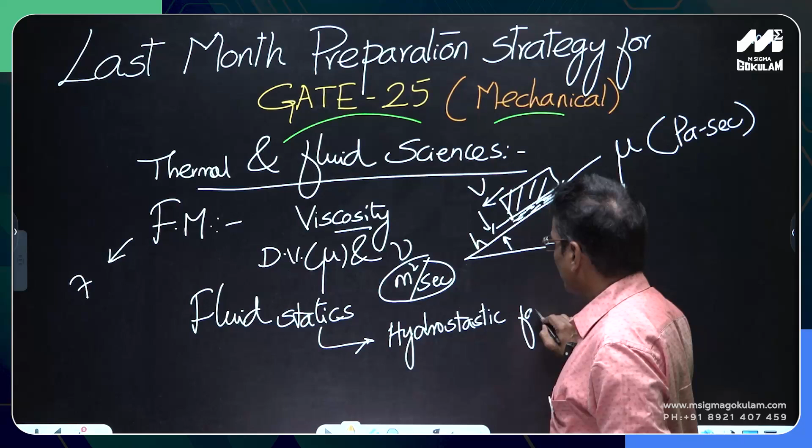Another important chapter where you have to give focus is fluid statics. In fluid statics, the main thing they will ask will be the hydrostatic force. Not many cases are there, just the vertical lamina, horizontal lamina, inclined lamina, and hydrostatic forces on immersed surfaces. Generally certain complicated geometries will be there. For example, there is one cylindrical log, and on one side of the log there is water.

What will be the hydrostatic thrust on that log? Maybe a horizontal thrust, or you may be asked to calculate what is the horizontal thrust and what will be the vertical force. So questions may be asked on hydrostatic forces on curved surfaces. In fact, it was asked in GATE 2004 and in GATE 2013.

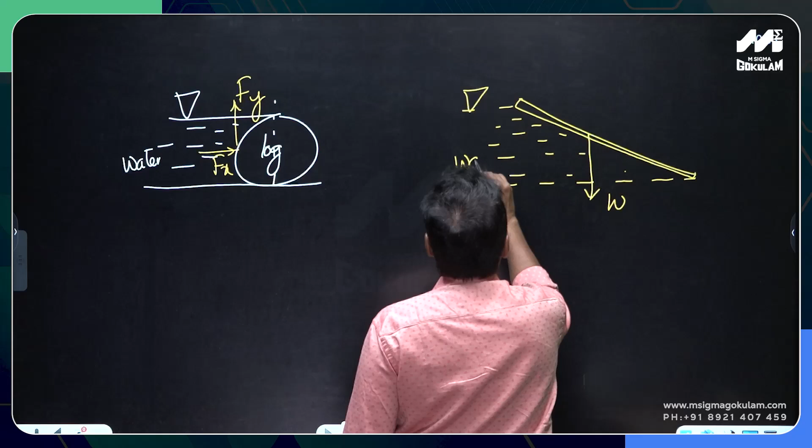In GATE 2013, they asked about one inclined plane carrying water on one side. What should be the minimum weight of the block so that it will not get lifted up by the water force acting on it from the left side? This is all water. So this is a case of the force on an inclined flat plane.

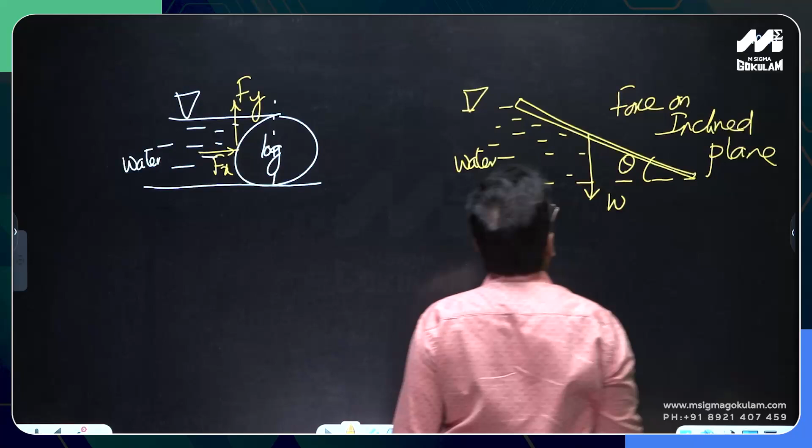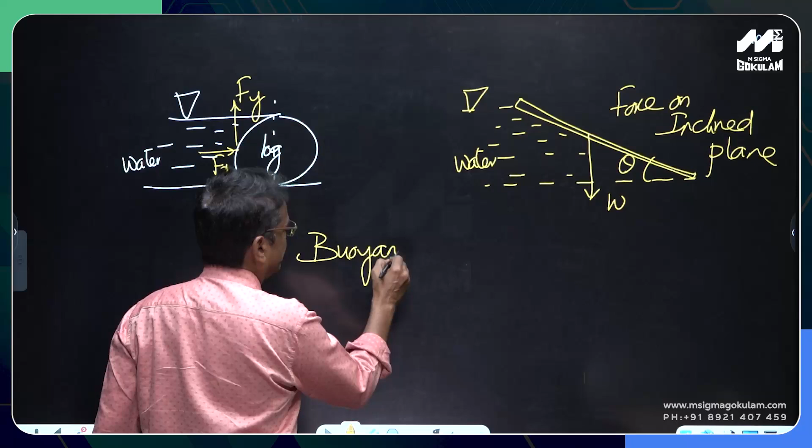You will be given the angle theta there. What will be the minimum weight of that inclined plane body, one side of which is exposed to the water? So questions may be asked in the second chapter on hydrostatic forces. And in that chapter there is another important topic, called buoyancy. Apart from the hydrostatic force, there is buoyancy and flotation, the conditions of static equilibrium in a completely immersed body and a floating body.

As far as buoyancy is concerned, the main important principle we have to remember is the Archimedes principle. Whenever a body is floating over a liquid or submerged inside a fluid, there will be an upthrust acting on the body which is equal to the weight of the liquid displaced by the body. As long as you are quite aware of that principle, you can solve any question given in buoyancy.

A floating body means a ship. A completely submerged body means a submarine or a balloon floating in air. So for a floating body and for a completely submerged body, what are the conditions of equilibrium? There will be stable, unstable and neutral equilibrium. For a completely submerged body, the relative positions of the center of buoyancy and the center of gravity will decide the condition of equilibrium.

Whereas for a floating body like a ship or a boat, the relative positions of the meta-center and the center of gravity will decide the condition of equilibrium. For a completely submerged body like a submarine or a balloon, the relative positions of B and G, the center of buoyancy and the center of gravity, will decide whether it is a stable, unstable or neutral equilibrium. So you have to remember that.

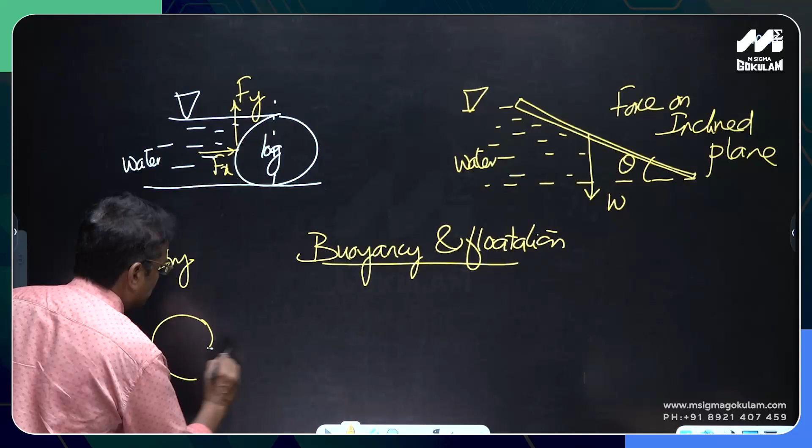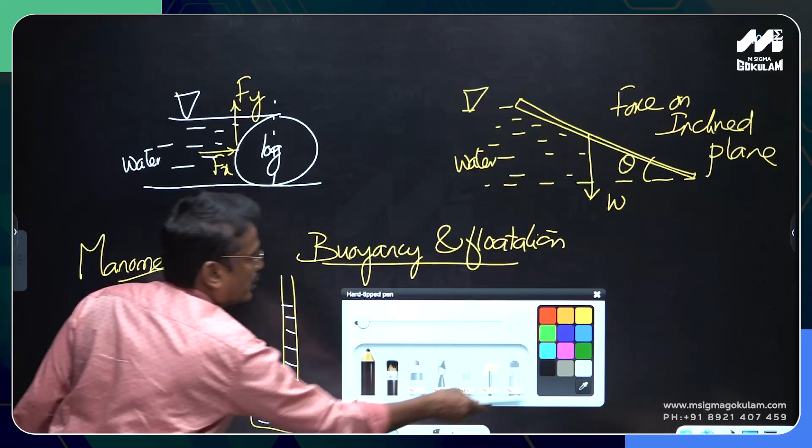In hydrostatics, three important topics are there: manometry, hydrostatic forces on immersed surfaces, and buoyancy and flotation. In buoyancy and flotation, we should know what the meta-center is, and how the relative positions of the meta-center and the center of gravity decide the condition of equilibrium. That is all about fluid statics.

So coming to the single most important chapter in fluid mechanics: fluid kinematics. This is very important, because in fluid kinematics questions will very often be asked. Why? Because it is connected with the mathematical expression of the fluid flow. First of all, we have to decide what is the meaning of the streamline, path line, streak line.

Okay, that is number one. And velocity potential function, stream function psi, velocity potential phi and stream function psi. So the definitions of that, and what is the definition of the streamline, what is the equation of the streamline. Most important problem in the FM questions will be getting the equation of streamline.

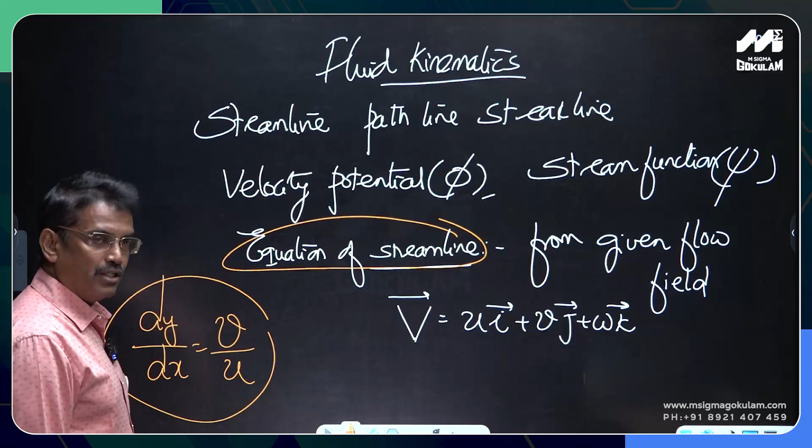equation of the streamline. We all know that the equation of the streamline for a two-dimensional flow begins with dy/dx = V by U. We have to begin from here and keep integrating that to get the equation of the streamline. Streamlines, for which psi is constant, and equipotential lines, for which phi is constant, are orthogonal to each other. They cut orthogonally everywhere in the flow field except at the stagnation points.

So we have to give more focus to this chapter in FM. When I say more focus, we have to know the continuity equation in three-dimensional flow. For three-dimensional steady incompressible flow, dou u by dou x plus dou v by dou y plus dou w by dou z is equal to 0. This is the three-dimensional continuity equation in differential form, meant for steady incompressible flow. This is also given as divergence of V is equal to 0.

So if you are given any two velocity components, we can calculate the third component by substituting in this continuity equation. Continuity equation is after all a law of conservation of mass. Entire fluid dynamics, when fluids are in motion, can be condensed into three conservation rules. One is the conservation of mass or the continuity equation. Second is the conservation of momentum, Newton's second law applied to fluid flow, for example the Navier-Stokes and Euler's equations of motion. These are all conservation of linear momentum.

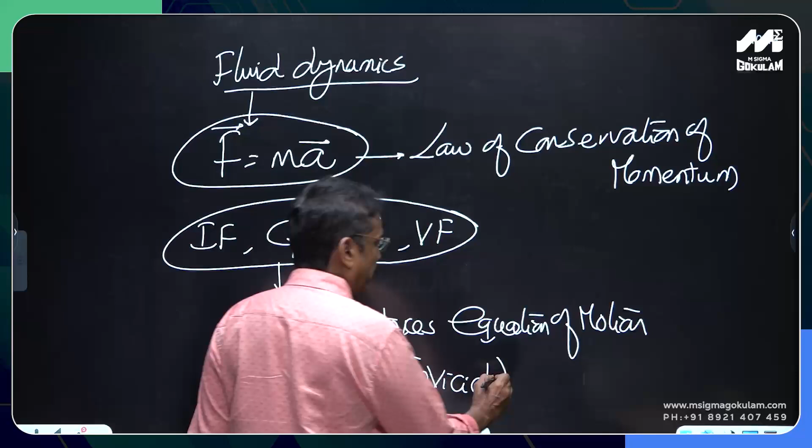What do you mean by inviscid flow? We are assuming that the fluid has no viscosity. Is it practically feasible? No. Every fluid has more or less viscosity. Some have more, some have less, but even gases, even air has viscosity. So if you make the viscosity of the fluid 0, you are considering pressure force, gravity force, and of course inertia force. If F minus ma is equal to 0, that minus ma is called the inertia force from D'Alembert's principle.

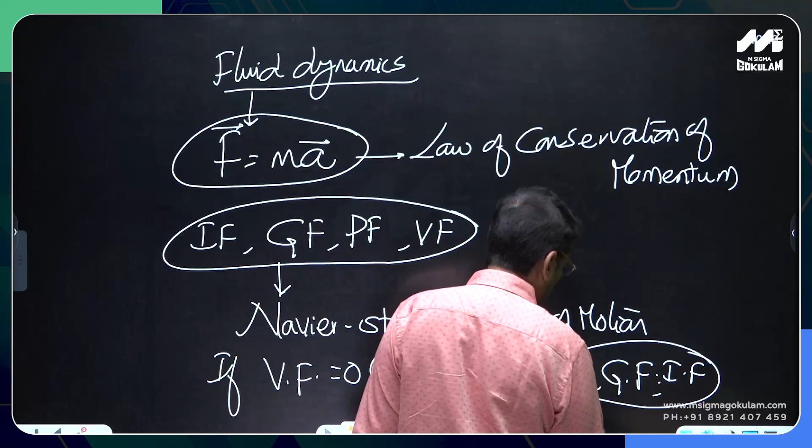So if you consider the pressure force, gravity force, and inertia force, such an equation of motion is famously known as Euler's equation of motion. Navier-Stokes and Euler's equations of motion have the same principle, but the only difference is in the Navier-Stokes equation we consider the viscous forces, in Euler's equation we don't. That distinction must be made. Euler's equation of motion along the x direction is equal to ax.

When you write the fluid kinematics for steady flow, this is Euler's equation of motion along the x direction. In fact, this is a convective acceleration. I already told you the kinematics of fluid flow is the single most important chapter in FM. Why? Because that is where you learn the types of accelerations.

In kinematics, the acceleration has two different kinds of expressions: convective acceleration and local acceleration. We should know the mathematical expressions for them along x, y, and z directions. In a cylindrical coordinate system, there may be tangential and normal acceleration. When expressing acceleration, we may consider two coordinate systems, Cartesian and cylindrical. In Cartesian, ax, ay, az. In cylindrical, normal acceleration and tangential acceleration.

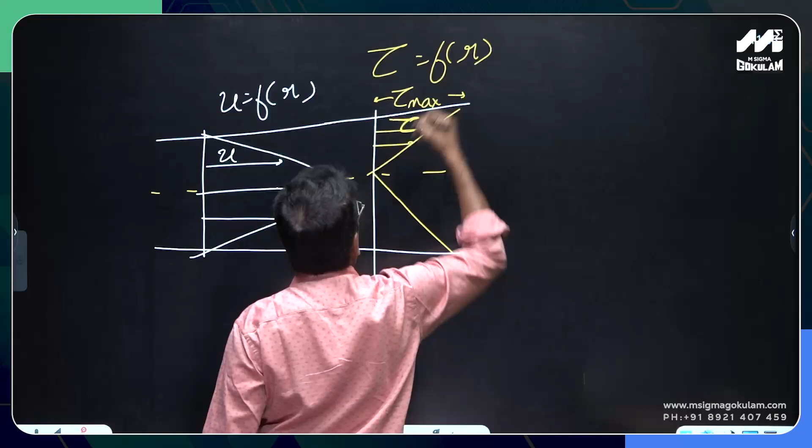So where the shear stress is maximum, where the shear stress is zero, you should know the velocity profile and the shear stress profile. Shear stress is also a function of radius, where r is the radial coordinate measured from the axis of the pipe. So these things we have to remember. Questions were very often asked.

So, in order of priority: the first important chapter is kinematics of flow, second is fluid dynamics, third is incompressible flow through pipes. There we bother about major losses and minor losses. The major loss is head loss due to friction, and minor losses may be energy loss due to sudden enlargement, sudden contraction, etc. But they are not that important; minor losses we don't consider much. So the third important chapter is incompressible flow through pipes.

Then comes another chapter, particularly for mechanical, which was recently introduced, I think in GATE 2019. For the last four years there was no change in the syllabus of GATE mechanical. That chapter is compressible flow. Earlier compressible fluid flow was not there in GATE mechanical, but now it has been given as a separate entity. In GATE 25 also it is there, because there is no change in the syllabus for the last 4 or 5 years.

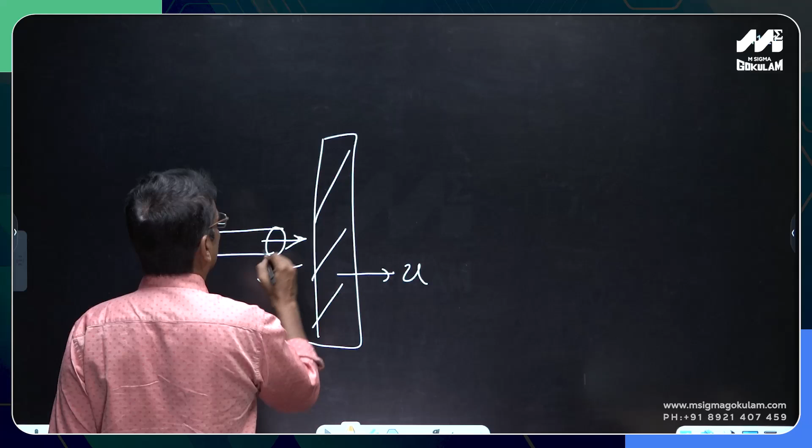When you talk about conservation of momentum, we have to deal with forces, forces over pipe bends also. Impact of jets and forces over pipe bends, that is also an important case. A jet is issuing from a nozzle and striking a moving plate. How to calculate the force exerted by the jet on the moving plate? Sometimes the plate may be stationary, sometimes a moving jet can be impinging over a vane. That is also impact of jets, an application of the conservation of momentum.

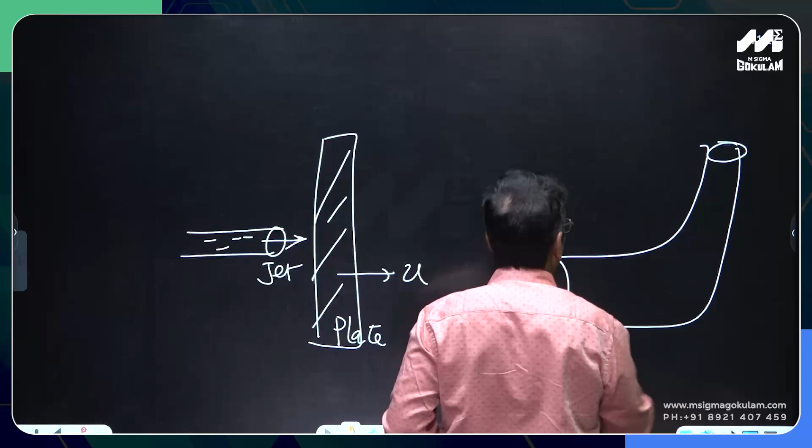Application of conservation of energy, Bernoulli's equation, you see in the Venturi and pitot tube, whereas application of conservation of momentum you see in forces exerted by fluid over a pipe bend. Give it more importance, because conservation of momentum needs extra care since it involves direction. It is an application of Newton's second law of motion, which is a vector equation, so you have to bother about direction. Continuity and Bernoulli's equation have no worries about direction because they are scalar equations.

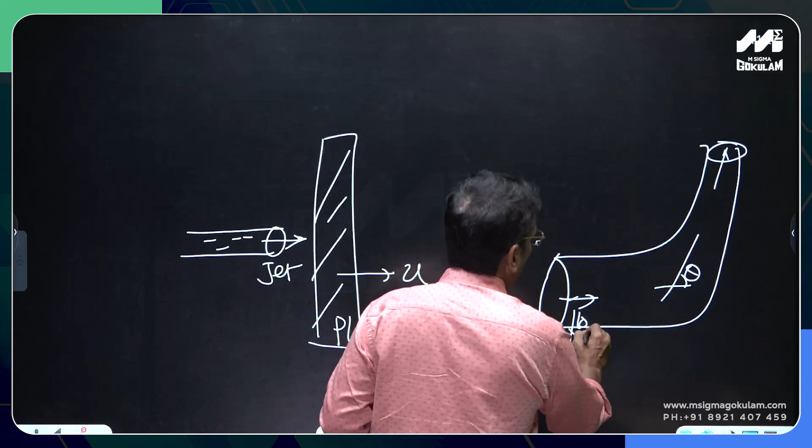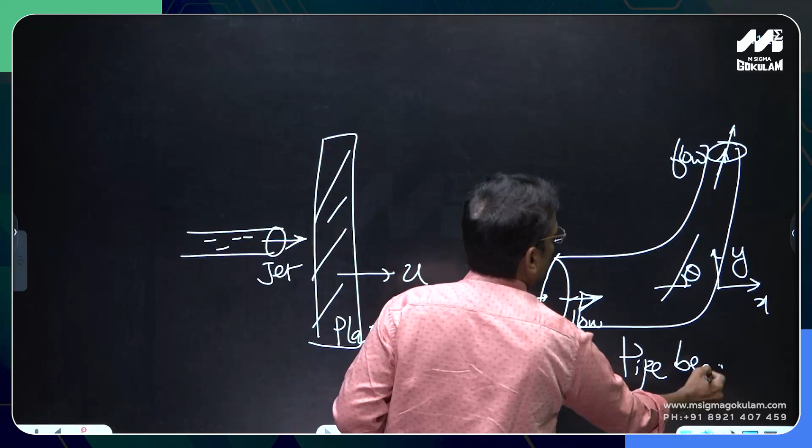So we have to write carefully how to calculate the net force exerted by the jet. Water is issuing like this and leaving like this. What is the force exerted by the water on this pipe bend, observed in the plan view, top view? So these two are the applications of conservation of momentum.

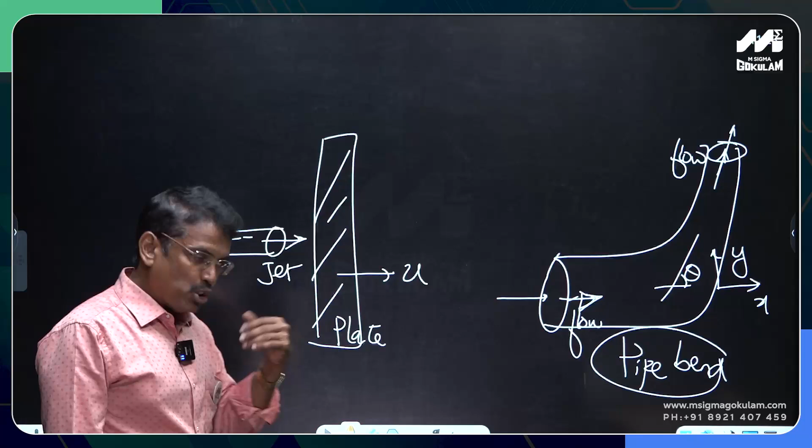Once you know this conservation of momentum application called impact of jets, you should be able to switch over to another important chapter called hydraulic turbines. We have three turbines, Pelton wheel, Kaplan and Francis, but the majority of questions will be asked on the Pelton wheel. Just try to remember Euler's turbine equation, which is a generalized equation for any turbomachine, and how to apply it for the Pelton wheel.

And when you talk about the hydraulic turbines, we should know the classification of the turbines, we should know what is the specific speed. The entire hydraulic turbines chapter we can write on a précis note of one page. We have the classification of the turbines based on the head, based on the specific speed, based on the type of flow, etc. And then velocity triangles, how to construct the velocity triangles, particularly for the Pelton wheel.

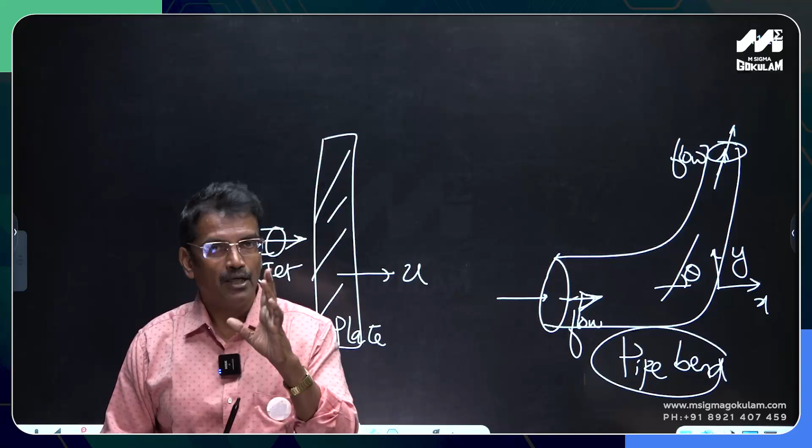You don't have to study Kaplan and Francis in detail. Okay, but of late no questions were asked in hydraulic turbines, but we can't take risk. Just give a look at the hydraulic turbines also, how to draw the velocity triangle, mainly for the Pelton wheel. For that, you should know the application of the impact of jets.

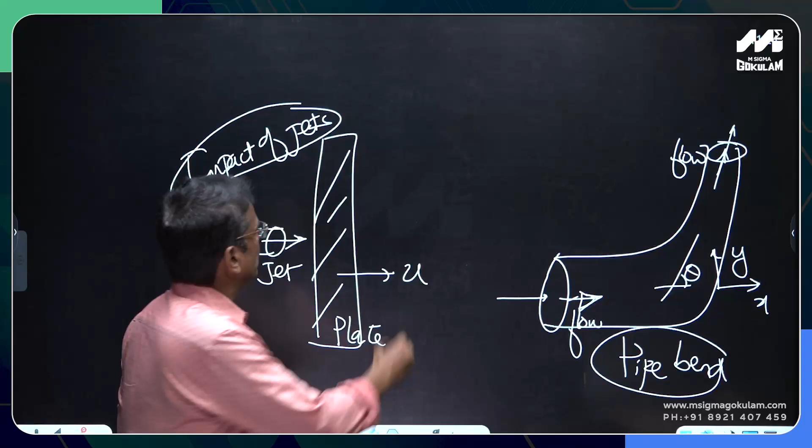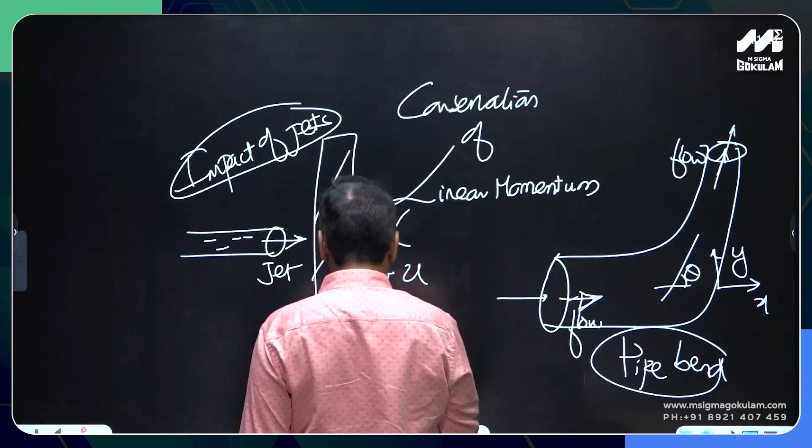Both are applications of the conservation of linear momentum, whose other name is the impulse momentum equation. It is famously known as the impulse momentum equation. Impulse momentum theorem they call, or impulse momentum equation they call, all mean the same. How to write the impulse momentum equation for these two cases, just try to learn that. So this is all about FM.

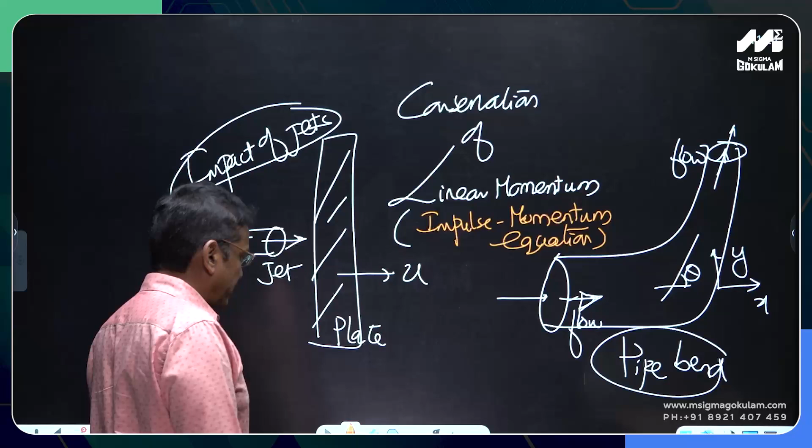So finally, regarding FM: fluid kinematics, fluid dynamics and incompressible flow through pipes is an easy chapter, because we have specified equations, Hagen-Poiseuille, Darcy-Weisbach, friction factor, and it's not a big chapter, incompressible flow through pipes. The entire chapter can be presented in half a page. And then coming to the applications of Bernoulli, applications of the conservation of linear momentum.

And dimensional analysis, I already said, only learn about those 5 numbers. Just learn about the dimensions there, which number talks about which force. For example, Weber number is important, particularly for surface tension force. Or Froude number, pertaining to the gravity force.

Euler number is pertaining to the pressure force. Reynolds number is pertaining to the viscous force. Mach number is pertaining to the elastic force or the compressibility force. When you talk about the Mach number, immediately the compressibility effects come into picture. What do you mean by compressibility effects? The density of the fluid is likely to change. If it is an incompressible flow, density will never change. Density is a constant. So this is all about FM.

Let me go to another important chapter called heat transfer. Of late, particularly since GATE 2022, I think in GATE 22 he asked 12 to 13 marks, the highest in that GATE. Tough questions, all questions were tough in this heat transfer. In GATE 2022 he asked I think 12 to 13 marks. In GATE 23 and 24 also.

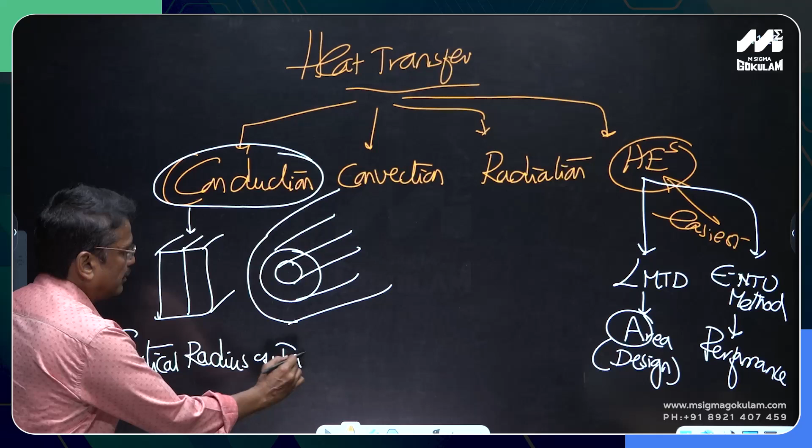unsteady state conduction or transient, particularly the definition of the Biot number, and of course Fourier number. Only these 2 numbers will come in the conduction chapter, Biot number and Fourier number. Particularly the unsteady state lumped heat analysis. Very often they ask when this lumped heat analysis is applicable, what is the criteria to apply that lumped heat analysis?

What do you mean by lumped heat analysis? We assume that the temperature of the body changes only with the time. There are no internal temperature gradients. The entire body is supposed to be at one temperature. Core of the body and the periphery of the body, everywhere the temperatures are same, but the temperature of the body keeps changing with time. Such thing is called the lumped heat analysis, where the Biot number is the criteria.

Critical radius of insulation is another example, and fins. When you talk about the fins, only 2 parameters we have to remember: efficiency of the fin and effectiveness of the fin. Efficiency of the fin, we already know the formula, tanh(mL)/mL, where m is the root of hP/kA. The effectiveness of the fin is the square root of kP/hA. Effectiveness and efficiency are different.

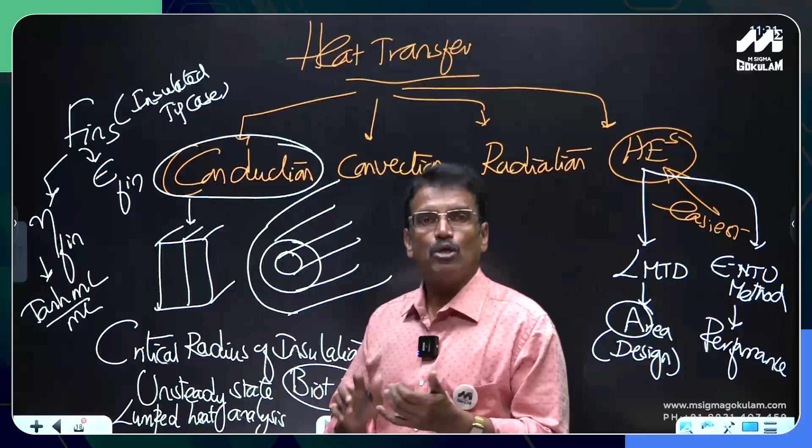Only 2 things will be there: how to calculate the heat transfer rate, and how to calculate the temperature distribution inside the fin. So in the conduction chapter, one is composite wall case, composite cylinder case, and recently very often the questions are asked in heat generation. This question is very commonly coming, heat generation in slabs or cylinders. Spheres they never ask, but cylinders they may ask.

When they talk about the heat generation, you get the Q dot. So when a slab is generating heat uniformly, this temperature and this temperature may be given, and we have to write the equation ∂²T/∂x² plus Q dot by k equals 1/α ∂T/∂τ, assuming one dimensional conduction, and this α is k by ρCp, also called the thermal diffusivity, a thermophysical property of the material. For steady state, the temperatures won't change with time. This τ is the time parameter, so this will become 0.

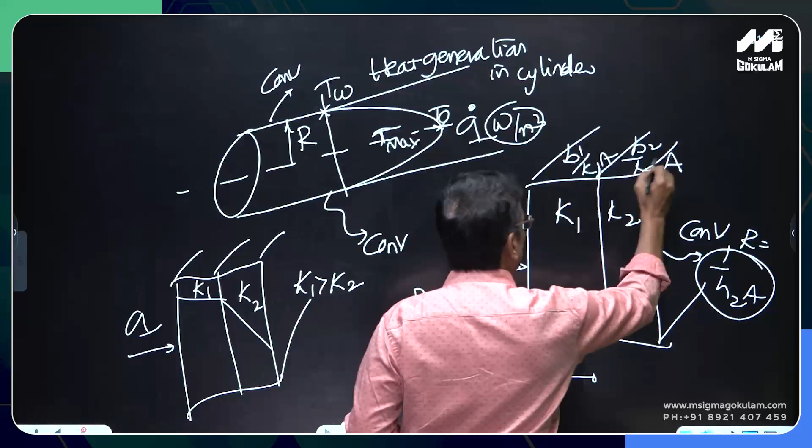So, we should know how to construct the thermal circuit. If you are not able to construct a thermal circuit wisely, you cannot do the problems on the composite slab cases as well as the composite cylindrical cases. In the very first chapter, conduction, which is the biggest chapter of heat transfer from the GATE point of view, just try to learn how to construct the thermal circuit. When you construct the thermal circuit, you must thoroughly understand what the terminals are.

Suppose this is a composite slab exposed to convection conditions on both sides; we have four resistances if this is the direction of heat flow. Convection resistance here 1/(H1·A), where A is the area of the slab, B1/(K1·A), this is B2/(K2·A), this is 1/(H2·A). So the rate of heat transfer can be calculated by connecting all these resistances in series. It is a series circuit because first convection, then conduction and again convection. So all the resistances are connected in series, mostly series only.

Only once, in GATE 2004 I guess, he asked about slabs connected in parallel, something like this. I will just show you, but that is a rare case. This is a slab with different materials, A, B and C. Then the thermal circuit will be like this. Resistances must be connected in parallel because heat conduction happens simultaneously through B and C. This is the resistance of B, this is the resistance of C, this is the resistance of A. Things like this may be given, but it is rare; most of the time they will give the series case.

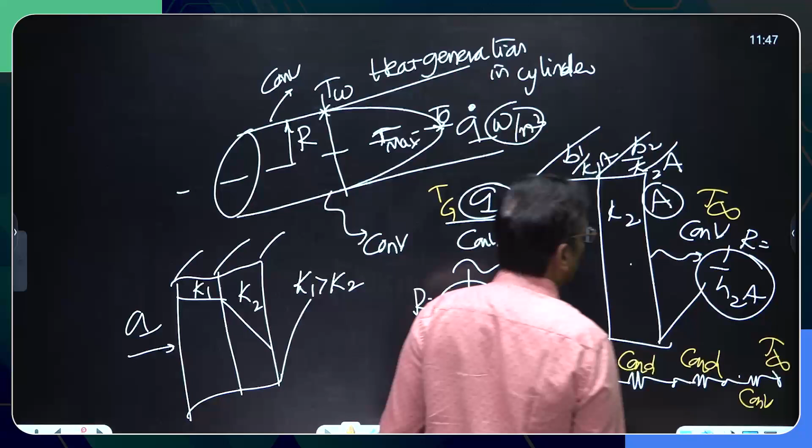And we should be able to identify: if this is Tg and this is T infinity, heat transfer happens like this. This is a convection resistance, this is conduction, this is again conduction resistance, this is convection resistance. They may ask the interface temperature, they may ask this slab temperature, or they may give this and this and ask you to calculate the right side. So you should be able to calculate either the temperatures at any location or the heat transfer rate. This is very easy, not at all difficult.

There are only two kinds of resistances: B/(KA) for the slab, and convection 1/(HA). If it is a cylindrical case, for example radial conduction, the heat transfer happens radially. Under such a case, the formula for the resistance, if this is R2 and R1, will be ln(R2/R1)/(2πKL). This is the conduction resistance for the hollow cylinder, radial conduction case.

When you are preparing short notes for the conduction chapter, take case after case. In the heat transfer conduction chapter, you should be able to distinguish one case from the other. Sometimes there will be heat generation, sometimes not; sometimes things will be steady, sometimes unsteady; sometimes one-dimensional, but two-dimensional cases are never given. I think only once, GATE 2008 I guess, multi-dimensional was given. In the last 25 years of GATE, except GATE 2008, I have never seen a two-dimensional conduction problem. All are one-dimensional.

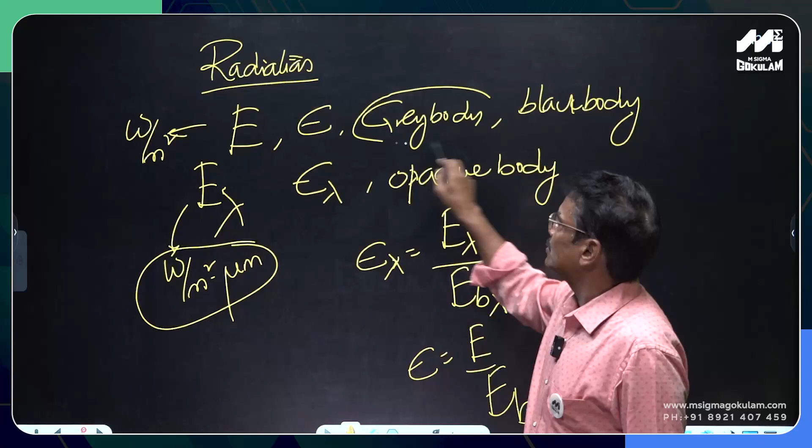So these definitions we have to thoroughly understand, and if epsilon lambda is constant, independent of the wavelength, it is called a grey body. Black body is a perfect absorber and ideal emitter. Black body absorbs all the radiation incident upon it. At the same time, compared to all other non-black bodies, a black body emits more radiation.

If 10 bodies are there, all at the same temperature, the black body emits more as compared to the other remaining 9 non-black bodies. So those are the definitions of black body, and more importantly the laws of thermal radiation. Actually there are 5 laws, out of which 4 are very important.

Kirchhoff's law: absorptivity is emissivity, alpha is epsilon. A perfect absorber is an ideal emitter. A good absorber is a good emitter. That is Kirchhoff's law, valid for both non-black and black bodies. For a black body both are 1, absorptivity is 1 and emissivity is 1.

And please remember these definitions also: absorptivity, reflectivity, transmissivity. These definitions also you should know. Alpha is absorptivity, rho is reflectivity, and tau is transmissivity. If tau is 0, such a body is called an opaque body. Fine. And then Wien's displacement law,

Stefan-Boltzmann law. Okay, Stefan-Boltzmann law, Wien's displacement law, and Planck's law of thermal radiation. And one more law is there, Lambert's cosine law, that is not much important, that is pertaining to the diffuse surface.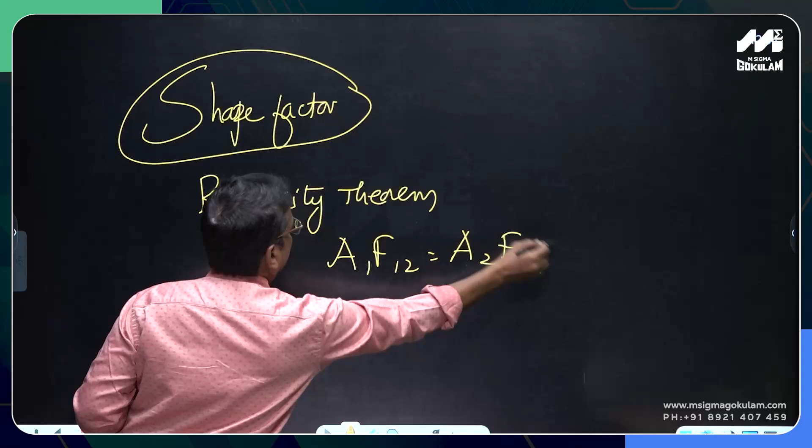And then the very commonly asked question in radiation is shape factor. Shape factor and the reciprocity theorem, the reciprocal relation pertaining to the shape factor: A1 F12 is equal to A2 F21. You should know how to make use of the reciprocity theorem in solving shape factor problems. In every GATE exam, usually you will see one question, a one mark question, regarding the shape factor. It has other names also: view factor, configuration factor, all mean the same.

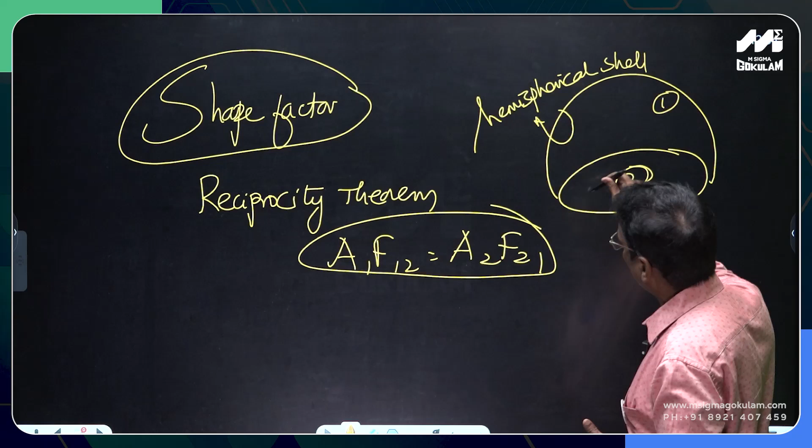Generally they will ask: a circular surface is bounded by a hemispherical shell, and you call this one. When you do shape factor problems, be careful about which number is which surface. Sometimes, to deceive you, they will swap the numbers to confuse you, so the relation and the value will change. So when you are using the reciprocity relation, you have to have a clear idea of what is 1, what is 2, what is the shape of that surface, and what is its area. Shape factor is very important there.

Then come the important cases of radiation. Two infinitely large planes, a very often asked case. For two infinitely large planes, the net radiation heat transfer is sigma times T1 to the power 4 minus T2 to the power 4, divided by 1 by epsilon 1 plus 1 by epsilon 2 minus 1. Emissivities and temperatures are given, and we should be able to calculate the net radiation heat exchange. In fact, this problem was quite often asked in many GATE exams.

Radiation heat exchange between two infinitely large planes, diffuse grey surfaces, temperatures are given. We need to calculate the net radiation heat transfer, T1 being greater than T2. This is a very common thing.

Another case they may ask is between two infinitely long concentric cylindrical surfaces. The net radiation heat transfer Q12 will be sigma A1 times T1 to the power 4 minus T2 to the power 4, divided by 1 by epsilon 1 plus A1 by A2 into 1 by epsilon 2 minus 1. So see, the two important cases: one is infinitely large planes, the other is infinitely long concentric cylindrical surfaces.

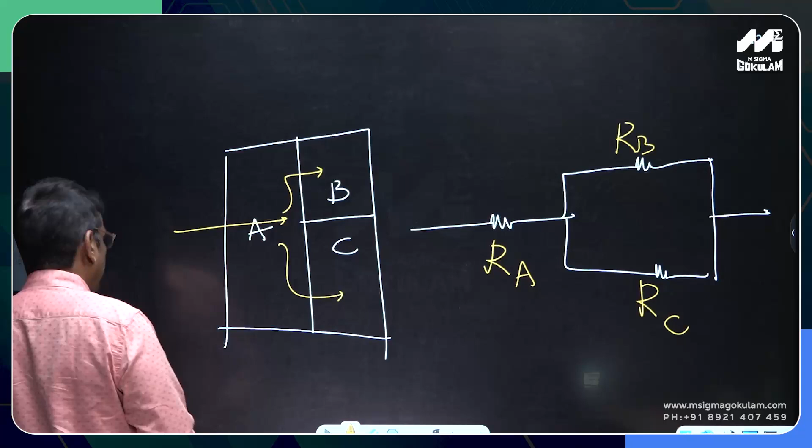And sometimes while typing, we have to look at the answers correctly. You got a degree Celsius answer, but he has asked the answer in Kelvin. You have put the Celsius, that is correct, but he has asked Kelvin units. You have to add 273 and put that. So which units he is asking, whether the answer is in watts or kilowatts, degree Celsius or Kelvin, kilonewtons or newtons. So that is all about this radiation here,

and in fact regarding the heat transfer subject. Heat exchangers is a very easy chapter. In heat exchangers, only two methods, LMTD and effectiveness-NTU method. And special cases you have to remember, particularly if m dot h Cph is equal to m dot c Cpc, it is called a balanced

counterflow heat exchanger. In counterflow heat exchanger, most of the cases they will give this case. I don't say that in every heat exchanger it happens, but particularly in a counterflow heat exchanger, if the capacity rates are equal on hot side and cold side, it is called a balanced counterflow heat exchanger. In such case, the temperature profiles will simply become parallel straight lines. Then delta Ti is equal to delta Te.

So LMTD definition and how to calculate this. Remember, in the entire heat transfer subject, this is the easiest chapter. If you get a question, you are lucky. Immediately first attempt this heat exchanger, because LMTD method is always meant for calculating the area only. LMTD method is all about the design of heat exchanger, just finding out the area.

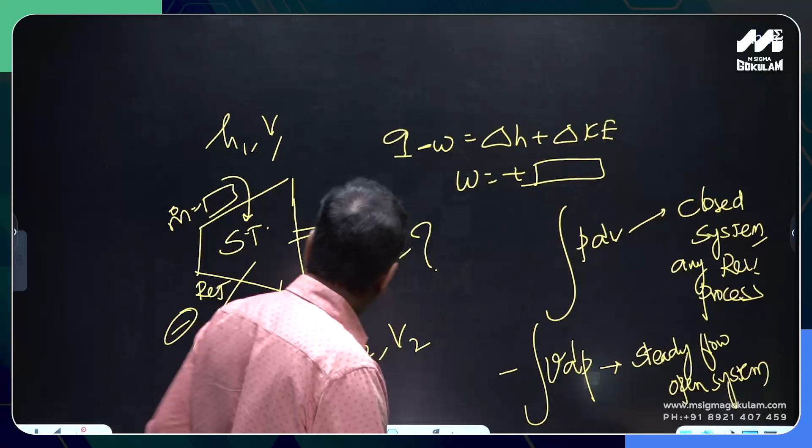So when you talk about the second law, thoroughly get the definitions of thermal efficiency of a heat engine, COP of a refrigerator, and COP of a heat pump. We have to be very thorough with the definitions.

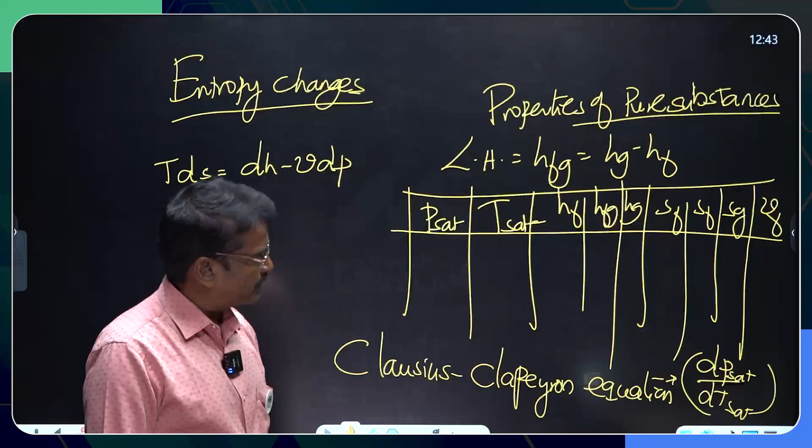And triple point definition, sublimation and a TS diagram. When you talk about the properties of pure substances, you will be seeing the TS diagram of the pure substance. If you learn properties of pure substances thoroughly, the analysis of the Rankine cycle and the vapor compression refrigeration system will all become easy. So, give more focus on this.

And last but not least, that is the available energy. Available energy is easy, available energy or exergy or availability concept. It is the maximum useful work obtained from a heat engine, assuming the sink temperature as that of the environment. When you talk about the available energy and availability function, the important thing is the ambient temperature.

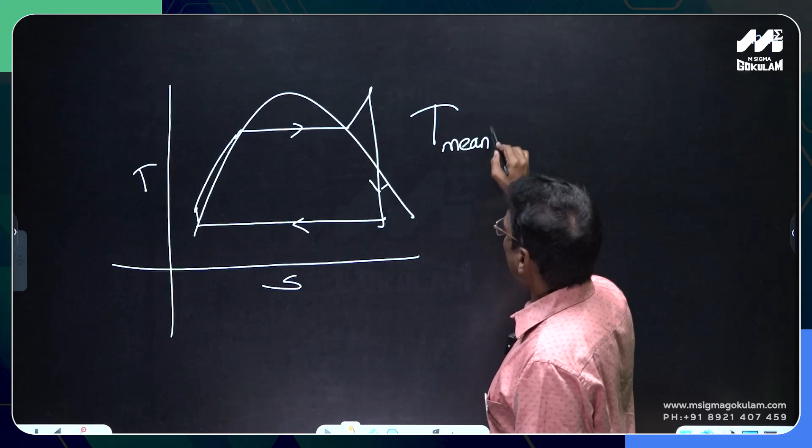When you talk about the Rankine, they don't ask much about the Rankine cycle itself, rather they will ask about the modifications. Modification means when you provide regeneration, what will happen to the mean temperature of heat addition. Mainly the question comes on T mean, that is the mean temperature of heat addition.

If this increases, the thermal efficiency of the Rankine cycle will increase. Any action you take that would result in the increase of mean temperature of heat addition will automatically result in increase of the thermal efficiency. And he may give you that property because steam is a pure substance, it is not ideal gas. They will give all the data, boiler pressure, condenser pressure, and all the property data in the question. They will ask you to calculate thermal efficiency, net work done divided by heat supplied, that is turbine work minus pump work divided by heat supplied in the boiler.

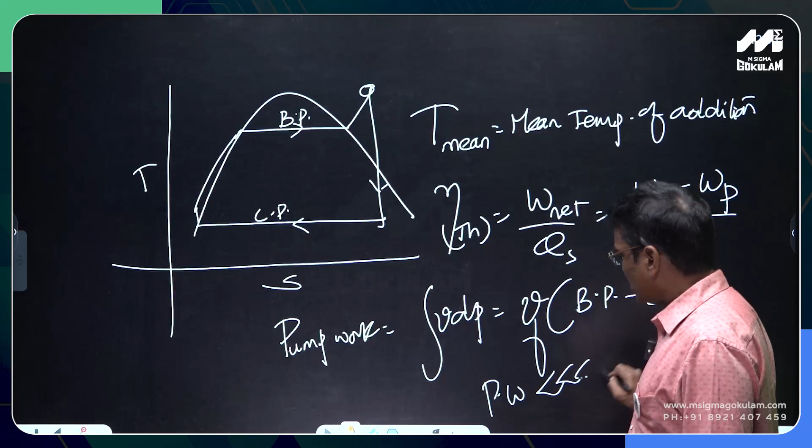So pump work most of the times they neglect, but pump work you can calculate from integral VdP. V is a constant for the water, V into boiler pressure minus condenser pressure. From this we can calculate the pump work, which is negligibly small; pump work is far lesser than the turbine work. Just 2 or 3% of the turbine work will be used to drive the pump here. So that kind of analysis we have to do. This is the work of pump. Here what you get is the work of turbine.

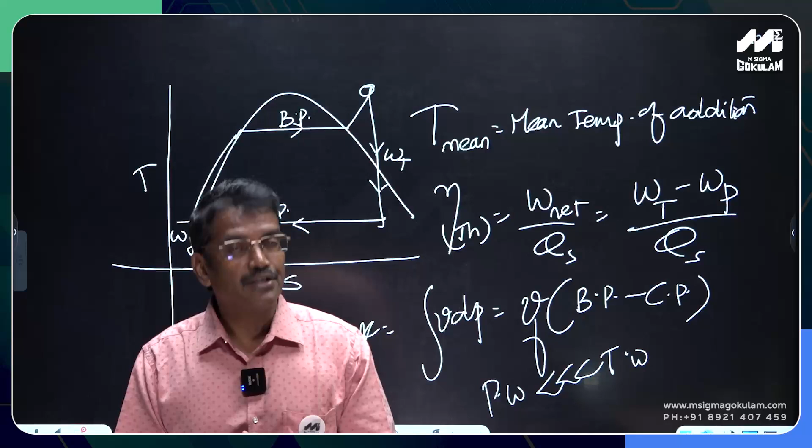Okay, Rankine cycle questions were repeatedly asked. See, in power plant, RAC, IC, most of the questions come from the Rankine cycle and its analysis. In the recent exams, I didn't find many questions on refrigeration and air conditioning. But if you talk about the RAC, only give attention to the VCR cycle, vapor compression refrigeration cycle. Simple dry saturated VCR cycle, try to give the attention. Here this is a condenser pressure, here it is an evaporator pressure. Vapor compression refrigeration cycle, you try to analyze, that will be sufficient.

COP. Main thing is how to calculate the COP. What is COP? Refrigeration effect divided by work done. What is the tonnage? Tonnage capacity of the refrigeration system will be mass flow rate of the refrigerant into refrigeration effect divided by 210. The refrigeration effect should be in kilojoule per kg. 1 ton refrigeration means 50 kilocalories per minute, or 50 into 4.2, 210 kilojoules per minute, or 3.5 kilojoules per second. This mass flow rate should be in kg per minute.

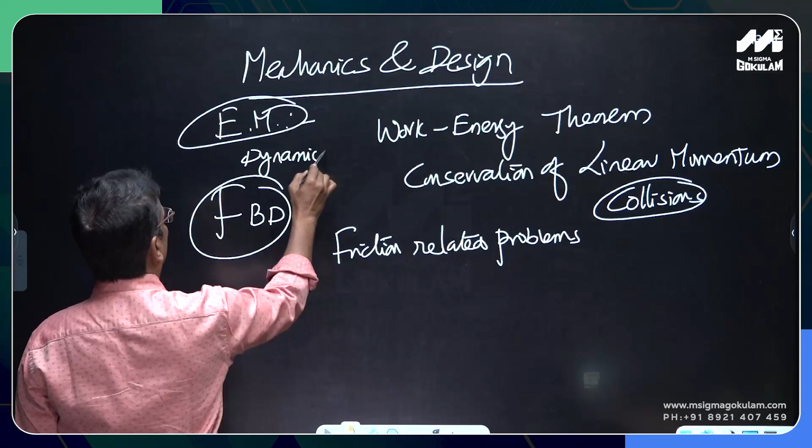Now coming to the applied mechanics and design stream. The first chapter will be engineering mechanics, EM. When you talk about engineering mechanics, give more attention to the dynamics part and how to make use of the work energy theorem, conservation of linear momentum, collisions. With conservation of linear momentum in the collisions chapter, coefficient of restitution, work energy theorem, free body diagram, where the main thing is how to construct the free body diagram, and friction related problems. Focus more on dynamics rather than statics. Generally the weightage will be 3 to 4 marks in engineering mechanics.

But generally people fear engineering mechanics because they studied it in the very first year of engineering. Try to read very good books like Beer and Johnston. Even as a last minute reference they will sometimes help you. Beer and Johnston or Timoshenko and Young. Those books are quite helpful in solving engineering mechanics problems.

Then comes strength of materials, SOM, mechanics of solids. Actually, this is the main subject. You may expect around 7 to 8 marks, because this is important. If this is learned, automatically machine design becomes easy, because machine design is a practical application of strength of materials. Like properties of pure substances are useful in RAC and power plant, in a similar manner, if you learn strength of materials thoroughly, the other chapter in the applied mechanics division, machine design, also becomes easy.

From the very first chapter, a good number of questions are asked on elastic constants, Hooke's law, that is Young's modulus, bulk modulus, shear modulus, Poisson's ratio. Poisson's ratio is lateral strain by longitudinal strain, and the relations among the four: E = 9KC/(3K + C). Also E = 2C(1 + 1/m), where 1/m is the Poisson's ratio.

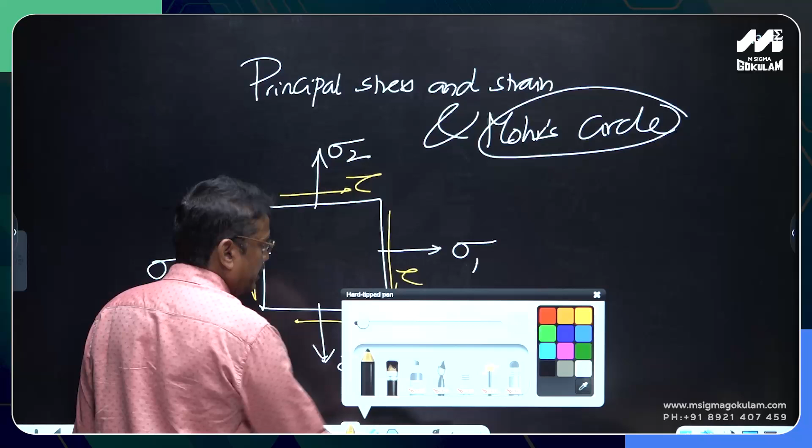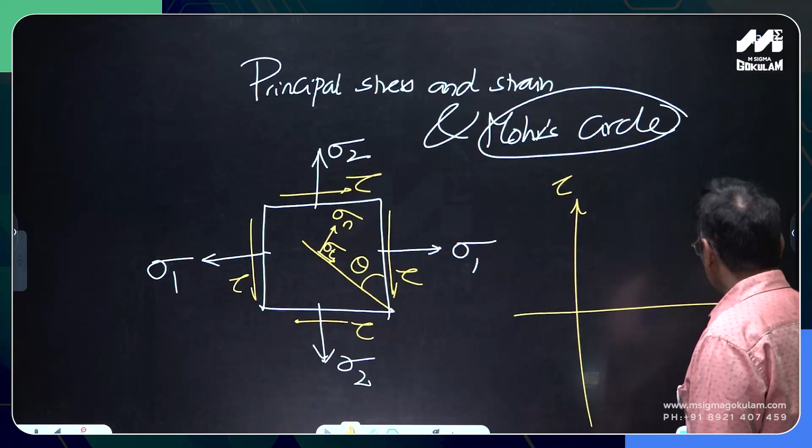For this kind of a case, on any plane which is considered at an angle of theta, how to calculate the normal stress and the tangential stress, that formula we have to remember. And what is meant by principal plane? What is the principal stress formula? How to construct the Mohr circle? In the Mohr circle, the x-axis is always for the normal stress, right? The y-axis is for the shear. How to construct the Mohr circle? And some special cases will be there.

When an element is subjected to only pure shear, no direct stresses are there, it is pure shear, right? Where did you see the pure shear case? Again in torsion. A shaft subjected to a torsion or twisting moment, if you take a small element in it, that is subjected to pure shear. If you take an element in the shaft of a member which is transmitting power, subjected to a torque or twisting moment, obviously that is subjected to pure shear. For that case, if you construct the Mohr circle, its center will be at the origin. This is the Mohr circle for pure shear.

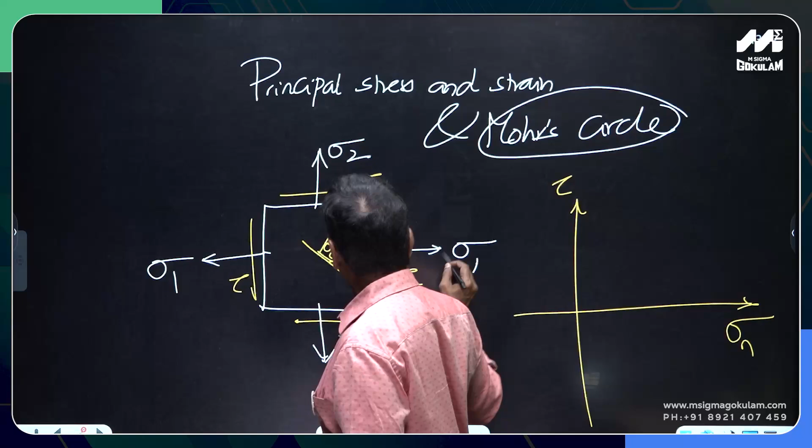And if you learn these principal stresses and principal strains, what is the principal plane first of all? It is the plane on which there are no shear stresses. The only normal stresses existing over the principal planes are called the principal stresses. And there will be two such principal planes located at 90 degrees. Sometimes the element may be subjected to compressive stress. For example, one may be tensile, the other direct normal stress may be of compressive nature. For all such variations, you should be able to construct the Mohr circle. What is the radius of the Mohr circle? What is the formula for calculating the radius of the Mohr circle?

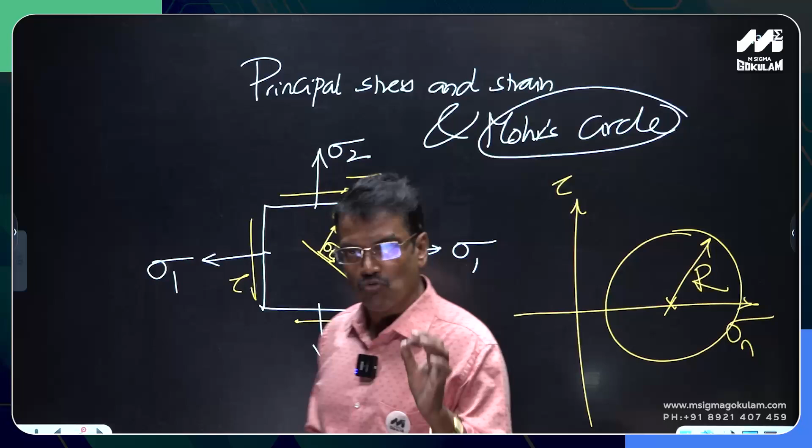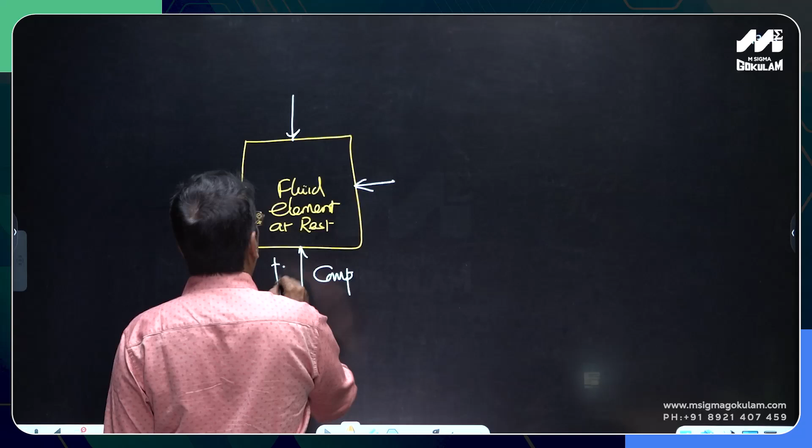When does the radius of the Mohr circle become 0? I'll give an example: a fluid element at rest. What is the radius of the Mohr circle? It is subjected to equal normal stresses, that too compressive. Why compressive? It is hydrostatic pressure. The pressure acting over all the sides is the same according to Pascal's law. According to Pascal's law of hydrostatic pressure, a fluid element at rest is subjected to the same compressive stress, or the same hydrostatic pressure, in all the directions.

I can say it the other way also. The hydrostatic pressure acting at a point in a static mass of liquid is uniform in all the directions. So in such a case, what is the radius of the Mohr circle? The radius of the Mohr circle becomes 0. That means if you draw the Mohr circle, this is sigma, this is shear, this is the Mohr circle.

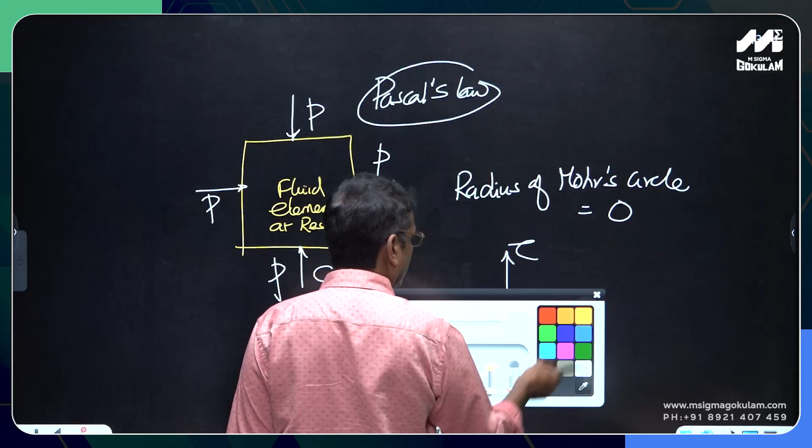This is the Mohr circle. The Mohr circle shrinks to a point. This is of compressive nature. Why is the negative side taken? It is of compressive nature. Hydrostatic pressure is compressive in nature. That is why he has taken it on the negative x-axis.

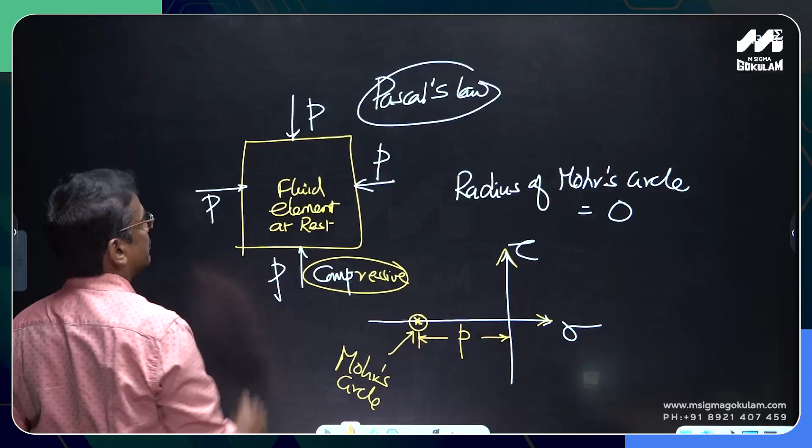This is the positive x-axis. This is the negative x-axis. This is the Mohr circle for this element. This is the fluid element at rest. Such kinds of questions will be asked in GATE.

Another main thing is principal stresses and strains and the application of the Mohr circle. This will be very useful to understand the theories of failure in machine design: maximum principal stress theory, maximum principal strain theory, maximum shear stress theory, like Rankine theory, Tresca's theory, von Mises theory.

So all these theories of failure will be understood only when you understand what the principal stress is, what the principal strain is, where the principal plane lies, and how much the maximum principal stress will be. One must be very thorough with all these things to understand the design problems.

And again, bending moment: BMD and SFD, shear force and bending moment diagrams. Point of contraflexure. And what are the conditions, like these equations? dM/dx is the shear force, dS/dx is the rate of loading.

How to construct a bending moment diagram for a simply supported beam for any kind of loading. Maybe part will be UDL, part may be a point load, that kind of problem. Where does the shear force change sign? Bending moment will be maximum where the shear force changes its sign, or shear force becomes zero.